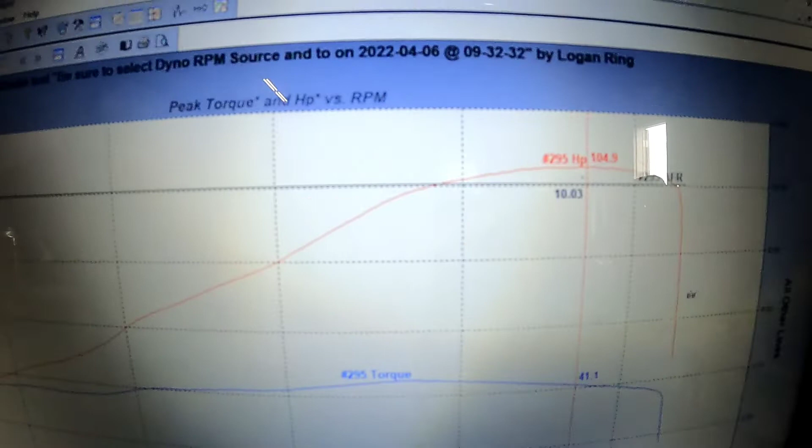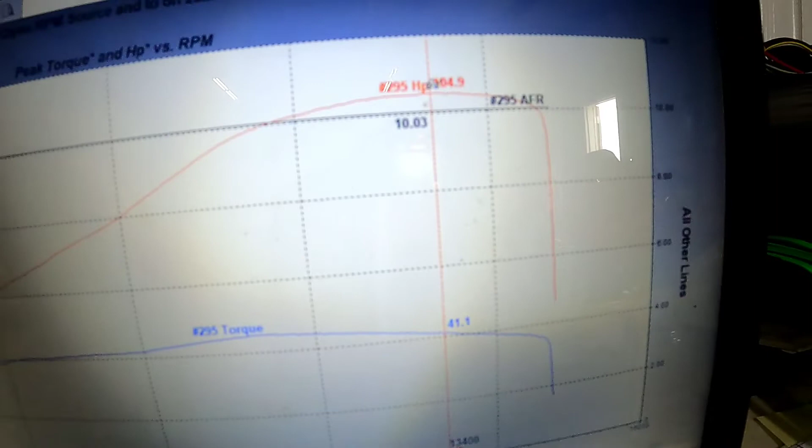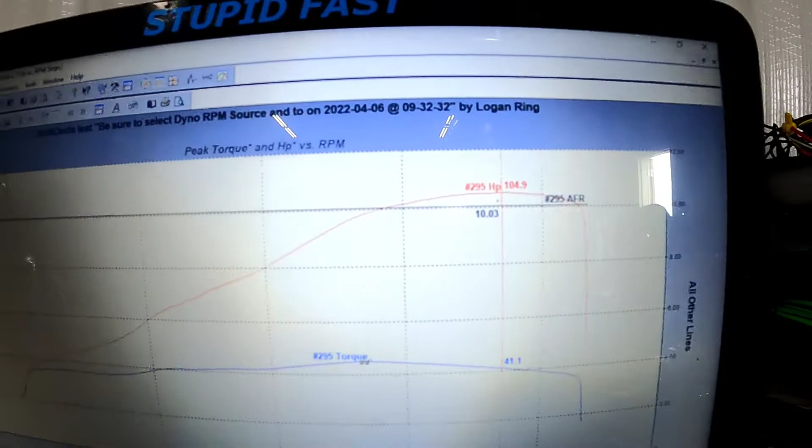All right, so here we are with our very first pull that we made in A mode. As you can see down here at the very bottom, it made a peak of 104.9 horsepower, and it's right here at 13,400 RPMs, so that's going to be your peak right in there. And then over here is our peak torque: 41.1 foot-pounds of torque at 11,450.

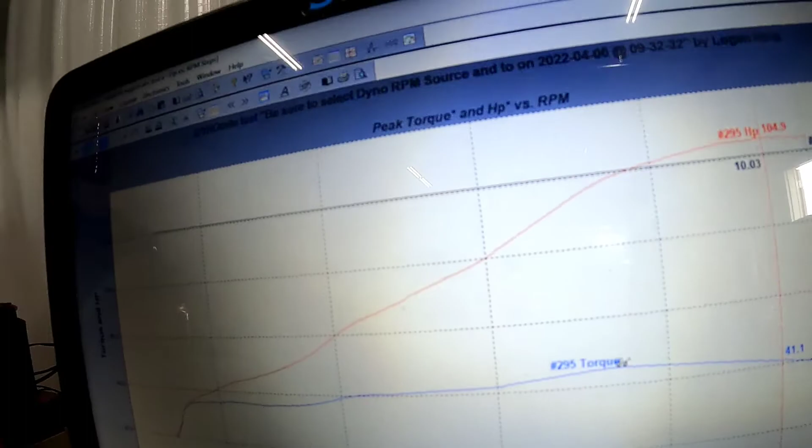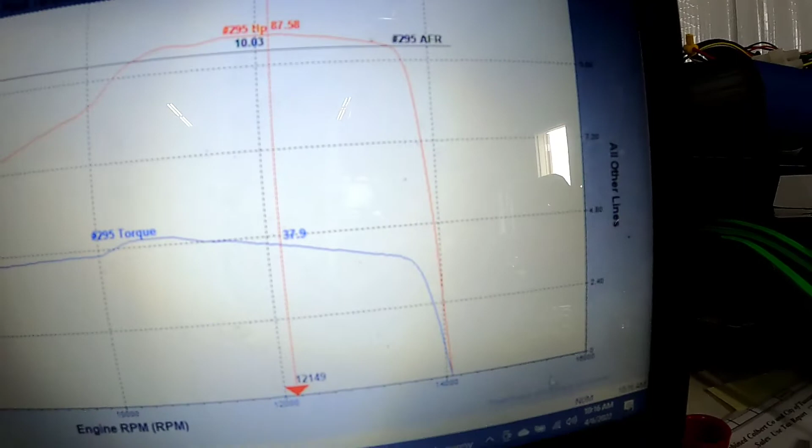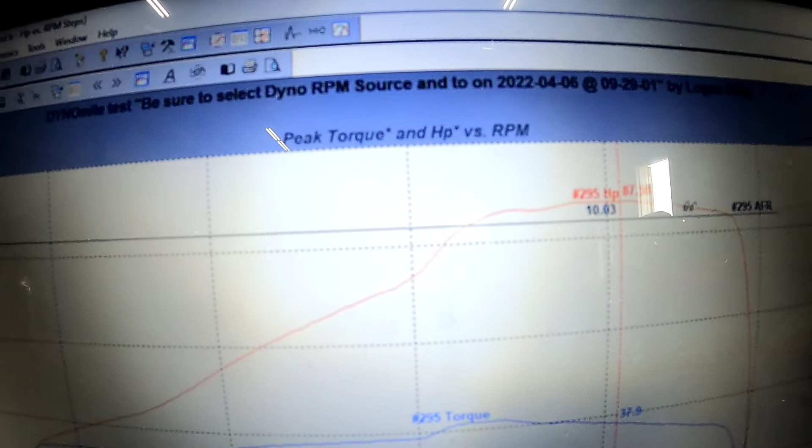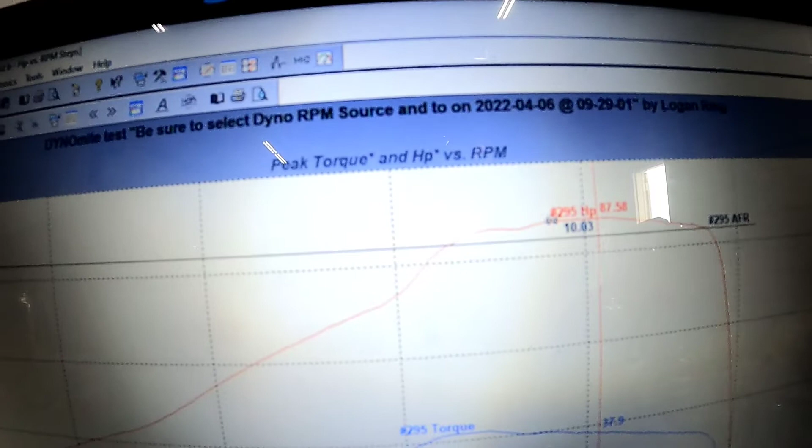All right, so let's switch it to B mode and see how much power they pull out of this thing. So down here in the bottom right, and up here at the top, we are making 87.58 horsepower. So it has pulled 18 horsepower away from it, and it's also not peaking as late either. This right here is hitting a little bit sooner and then kind of flatlining across through here. What they're doing is closing the secondaries off, that's how they control them. So your secondary throttle valves are what controls the power, and that's what the different modes do.

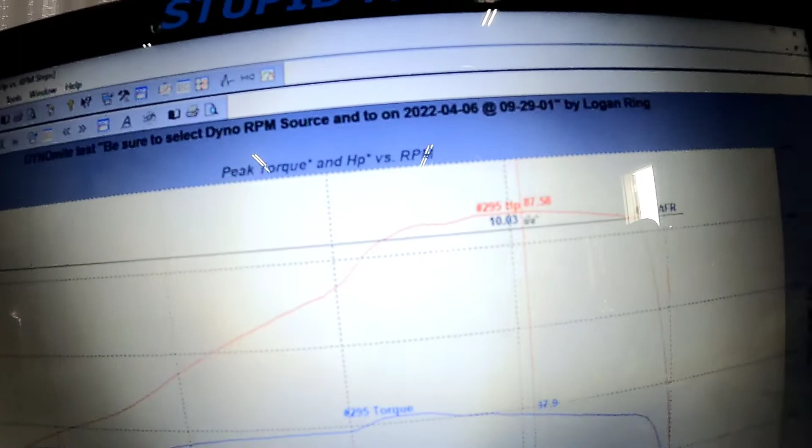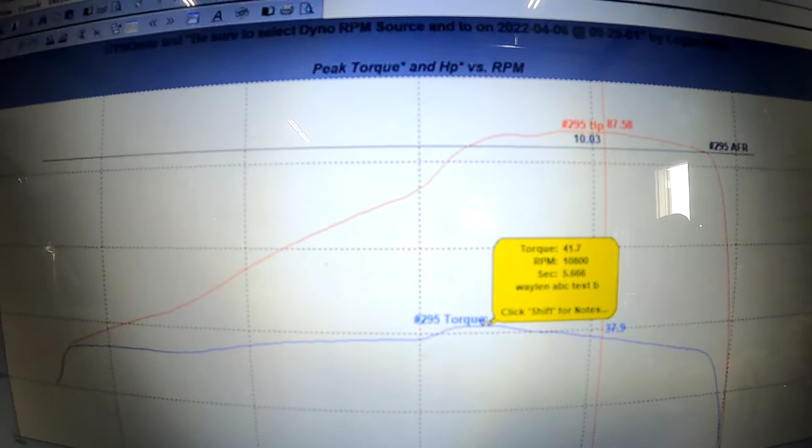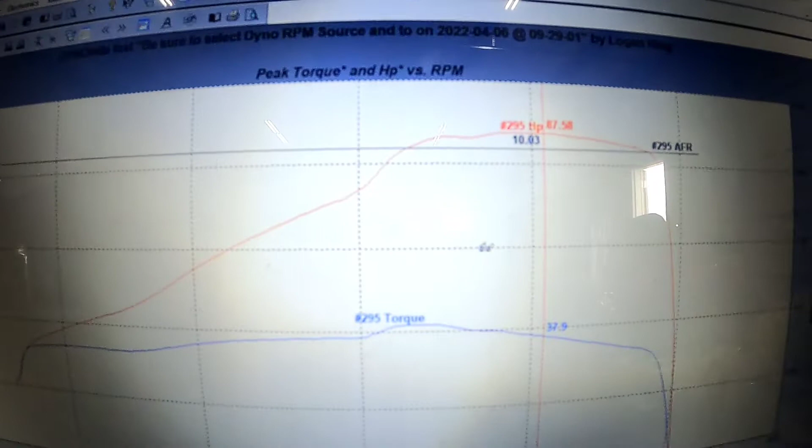So here we are, peak torque was 45.1 earlier, now we're at 41.7. There's not so much torque falling off, but later in the RPMs it starts closing the throttle plates off, restricting your top end whenever it's pulling. And these are all in 6th gear. I didn't make pulls in 1st and 2nd to see how much it really restricts down low, which it probably restricts even more. So this is just what it's doing in 6th gear, and whenever you're in your lower gears, usually they're all restricted even more.

And this is a completely stock bike with just a slip-on. The ECU hasn't been touched at all or anything, so this is just the results we're getting with a stock ECU and a slip-on on the dyno.

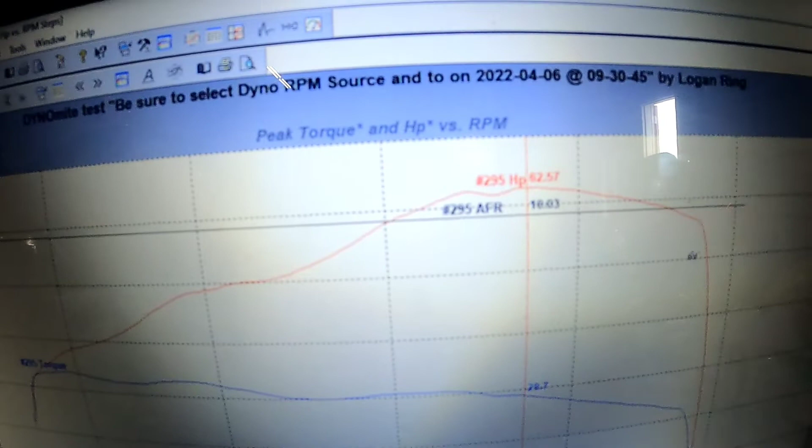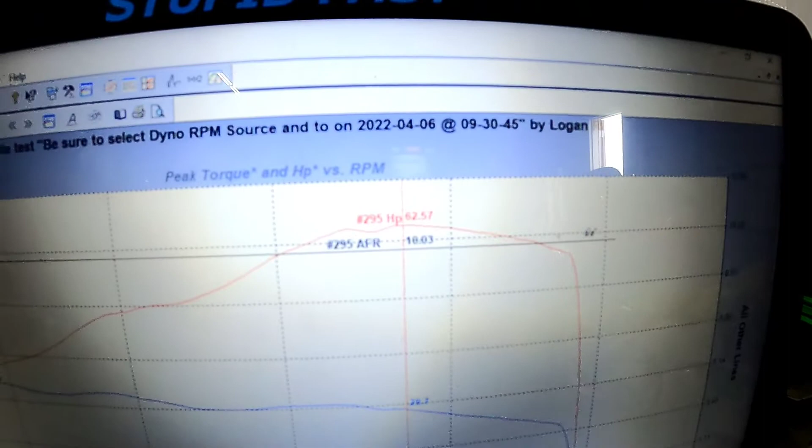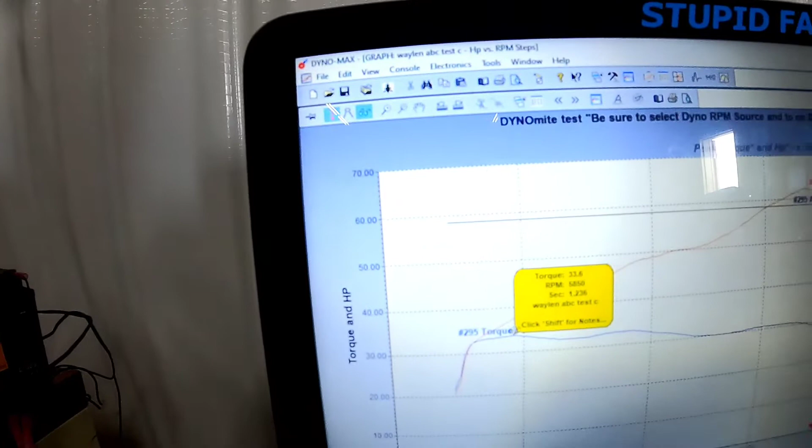All right, so let's see how much power they pull out in C mode. So here we go: 62.57 horsepower at 11,450 RPMs. So we fell off a whole lot of RPMs. We were way out here on the A mode run, and over here we're way down on torque. Your peak torque is going to be around 6,000, and it's down to 33.6 foot-pounds of torque. So they're really pulling it away there.

So you're down 25 more horsepower, a total of about 43 horsepower from A mode, so it's pulling a lot of power out. It's very good if you wanted to start somebody out on a sport bike, a 600, 750 especially, or 1000s and Busas. Definitely start them off in C mode, it can help somebody out to have a bike that's not going to get away from them. 62 horsepower is still faster than most any other smaller sport bikes, so this would be in comparison to, say, a Ninja 650.

The Ninja 650s are not like the Ninja 600s or the GSXRs that most people are thinking of. They're more of a sport touring kind of bike and make less power. Amos's Vulcan 650S, which uses the same motor as the Ninja 650, made 61 horsepower on this dyno. The Ninja 650 may be 65 horsepower or so, putting it in the same range as this bike in C mode, and comparable to something like a CBR 500, which would be down in the 40 to 50 horsepower range. I thought this trailer was pretty cool, a way to see exactly what the modes do.

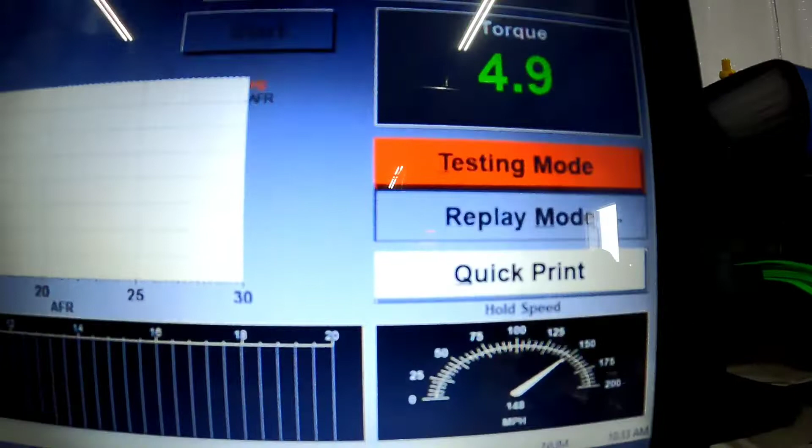Maximum mile per hour, 148 mile per hour.

I went and looked up what results we'd have if we were to change gears and put the stock gears back on it, doing the math. I also looked up what the advertised top speed is when you Google what my 08 GSXR 600 top speed is - according to Google, top speed on this bike is 165 mile per hour. If you put these stock gears back on it and put it back on the dyno, it will hit 165 mile per hour on the dyno, but there's no wind here.

So that's on the dyno with no wind. The bike does not make enough power - the power actually starts falling off at that speed anyways. So it's a theory that it would do 165, but it's not going to. Anyways, I just wanted to touch on that too while I was here, it was another thing I was wanting to see while I had it on the dyno.

So 148 mile per hour is what it actually did. It would do 165 on the dyno with stock gears on it, possibly - if the math works out correctly, that would be 17 more mile per hour because of the 1 down, 2 up change made in the gearing. So if there was no wind at all, put it on the dyno, yes it'll do that speed. But as far as how fast it can actually go, I just don't see it ever actually reaching those speeds.